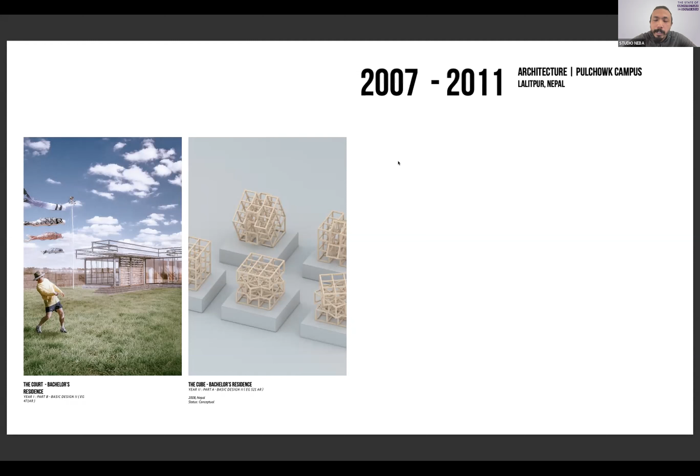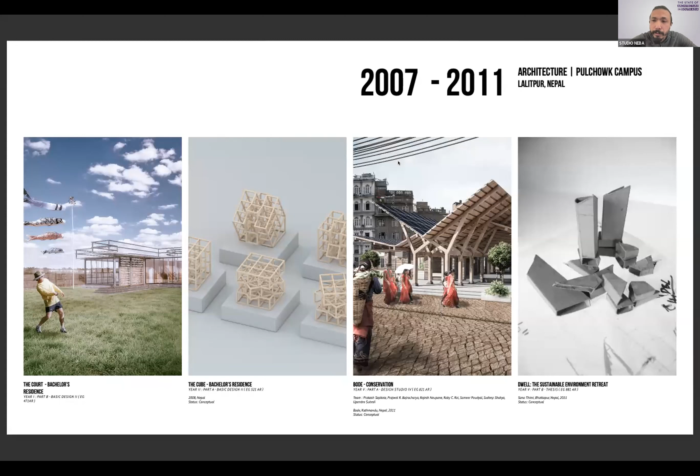And then I experimented on how the different forms could be tallied from the Rubik's Cube itself. These are some of the projects I did with a group of friends in fourth year and the final year in the thesis.

Right out of college, I volunteered at Habitat for Humanity for a year, where I had real life site experience working with natural materials such as mud, doing houses for rural areas. Then there was a project called Hariya Chok by Satya Group, where I worked as a volunteer, then as a project coordinator. In this project, we wanted to explore different ideas on how we could have urban green space in a very concrete city like Kathmandu. This is quite interesting.

I also applied for grad school the same year. As you can see, there's also GSD Harvard among all the documents with this peculiar name, because I wanted to keep track of my portfolio, since every university had different requirements and formats, GRE and all of that.

I did not get admitted to GSD, but here I am talking with teachers and students from GSD, and it's quite the whole circle, I guess - a quite interesting thing that I'm sharing here. Then again, I was looking for different jobs, thinking my portfolio would suffice.

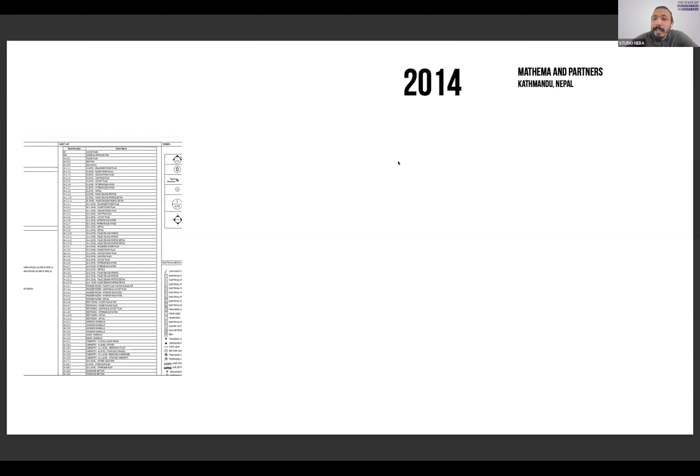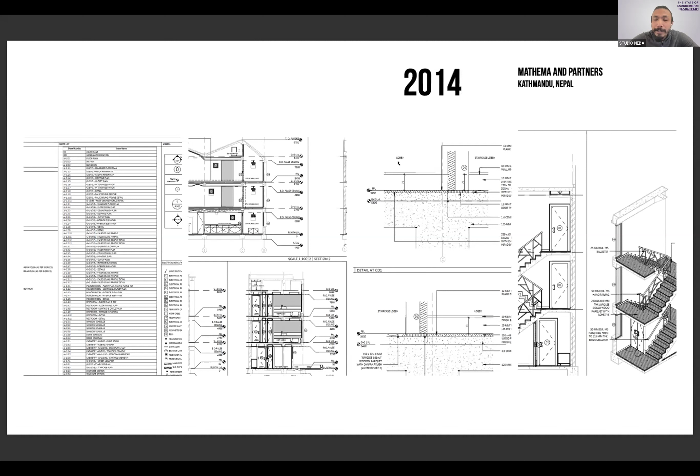After that, I joined a local architecture company in Nepal, Mathema & Partners, where I imagined that as an architect you would be doing design and mostly working out of creativity. But all I did was drawings for one whole year - it was all Revit, detailed drawings, construction drawings, and all of that, for one whole year.

And then the earthquake happened in 2015. This was quite a turning moment in my architecture journey, at a point where I was designing villas and resorts for people from different backgrounds.

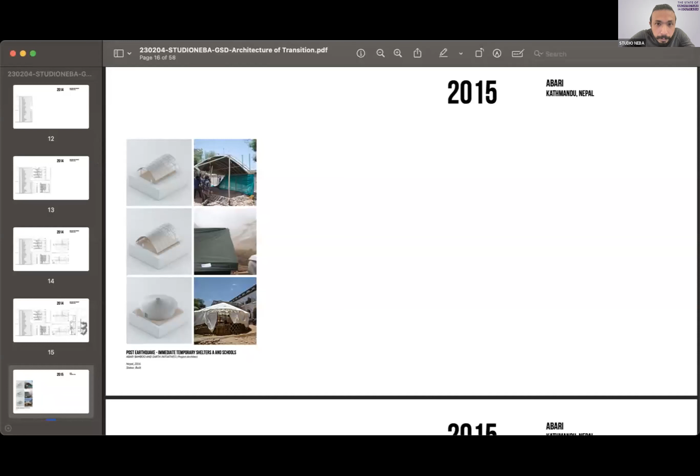But then when the earthquake happened that night, let me just get this thing outside. Is it audible? Hello? Yes, you're still audible.

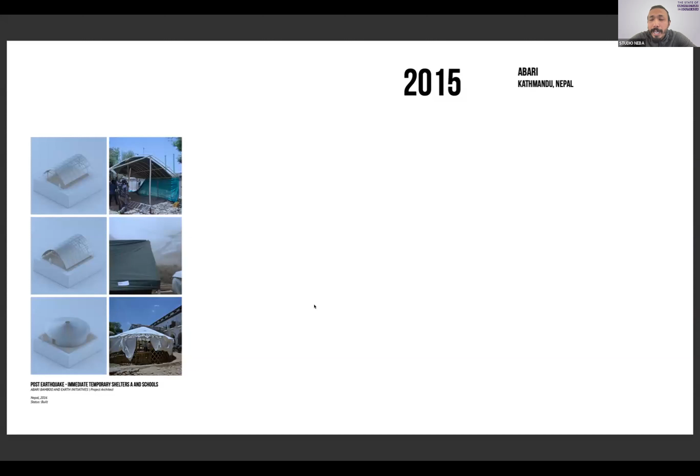In the night of the earthquake, we had to sleep outside because there were still tremors going on. We had this plastic tarp which I wanted to tie some knots and make into a tent, but I just could not do it. At that point, I was working as an architect with 5 years of education, and I could not even tie a tent to shelter from the rain during the earthquake. That was a very thought-provoking thing that happened.

I kind of questioned myself on what architecture is and how I could use my expertise in the field of architecture.

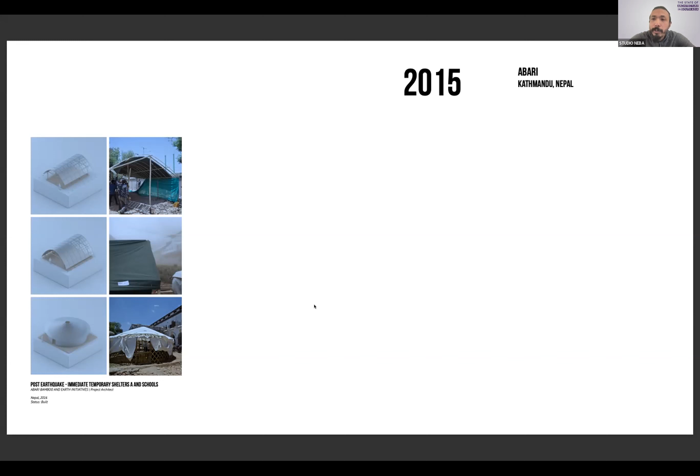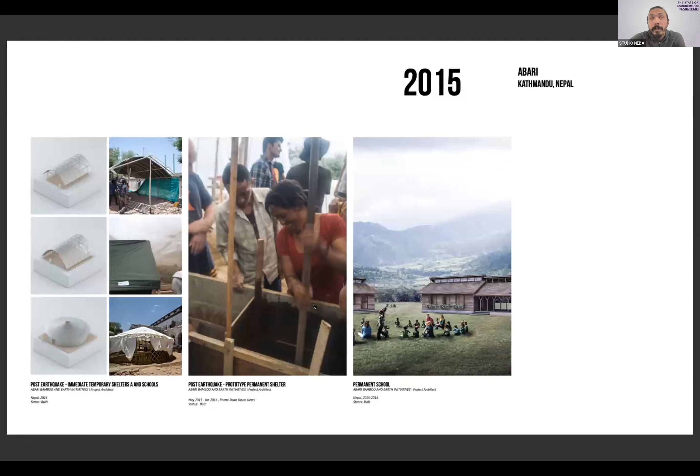So I decided to join an organization doing post-earthquake rebuilding all over Nepal with tents, and then permanent shelters out of rammed earth. We designed schools, and talked with the Nepalese government on how the rebuilding should go on, and again remodeling of the whole village itself with sustainable local materials rather than rebuilding out of steel and concrete.

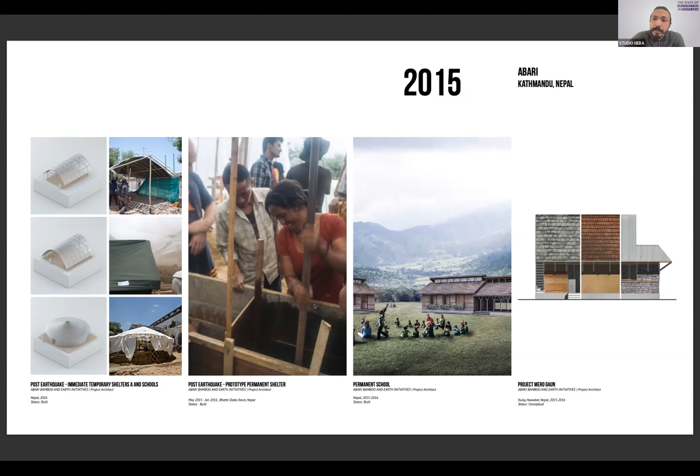And in this place with Alexis Dornier, I worked for 3 years. At this point, I had creative freedom as well as guidance on how the architecture could develop. Somehow we were aligned in our thought process and design, and I led some of these projects when I was in Bali for 3 years.

So in 2019, I decided to come back and I started Studio Neba. Studio Neba stands for Nepal and Bali, which has some rooted connection to where I stayed for certain years of my life, and a place where I belonged.

I started the company thinking I was an architect and could run my own things. But then I realized I needed someone who can draft, I needed a draftsperson, someone who could do renders, someone to design a website. And the list goes on - admin guy, accounts guy, project manager. Basically we needed someone who could do everything, so I decided to hire myself to fill all the gaps, because running a company and hiring everyone was not financially feasible at that time.

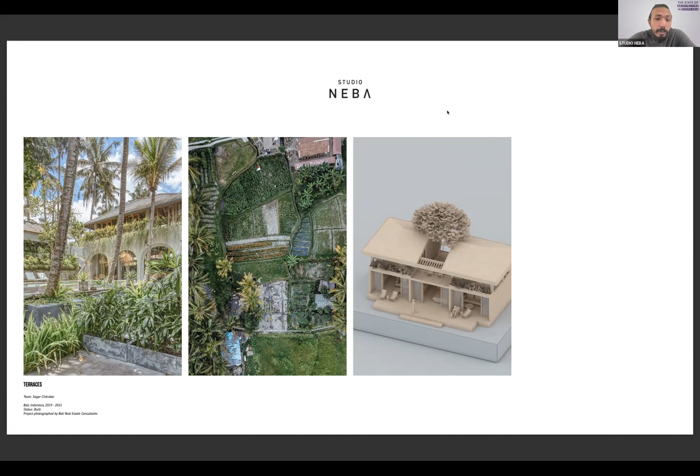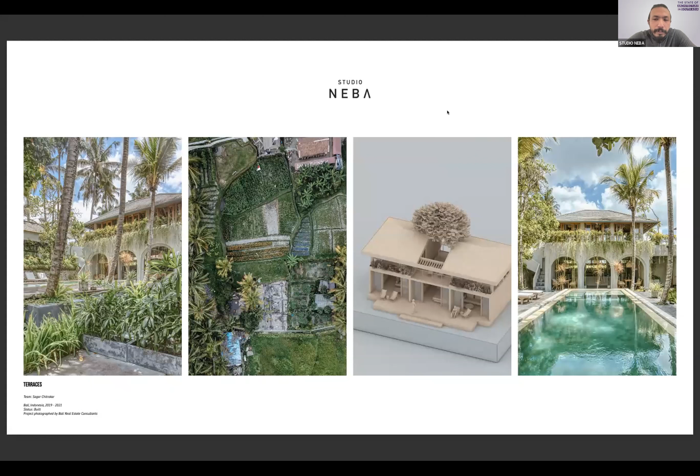It took a while - there was COVID, there was lockdown, and after 3 years the project is complete. I haven't had a chance to go and visit the place, but hopefully this year I'm planning to go there and see how the project turned out.

The next one is Pokhara Villas. This is also one of the first projects we got approached for when we came back to Nepal. This is a project in the western side of Nepal, in Pokhara. We got approached to design multiple villas in a serene mountainous site.

I also clearly remember when we went for the site visit, the client asked how much would you charge? At that point, I had no idea whether you should charge by square foot or lump sum. I had no kind of idea at that time.

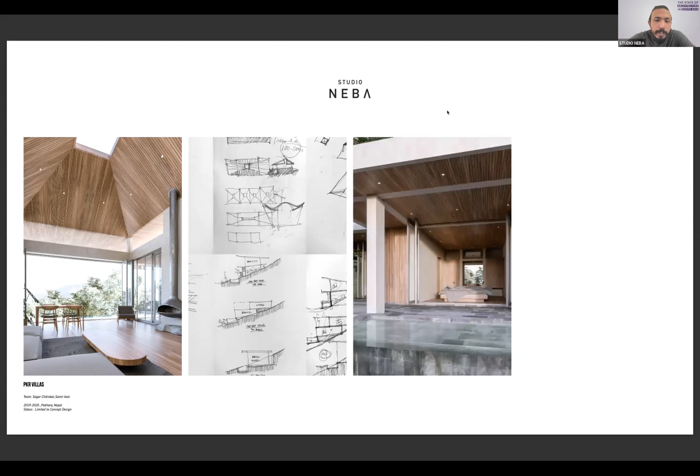We slowly built up the project. As you can see, there was multiple sketching done that could correlate to the contour of the existing site. We played through multiple iterations, and then we came up with this 2 BHK residential villa, which is one unit, and in the master plan there will be multiple units of this villa.

Even in this part there was COVID, there was lockdown, so it was only me and Samir at this time. We were working remotely, passing through the files and doing all the details and design.

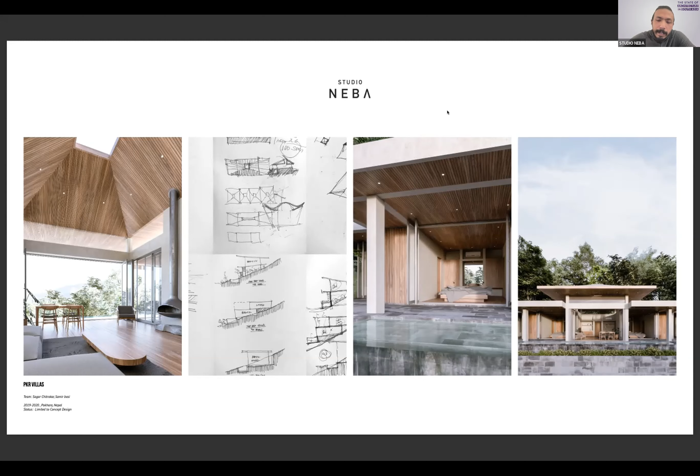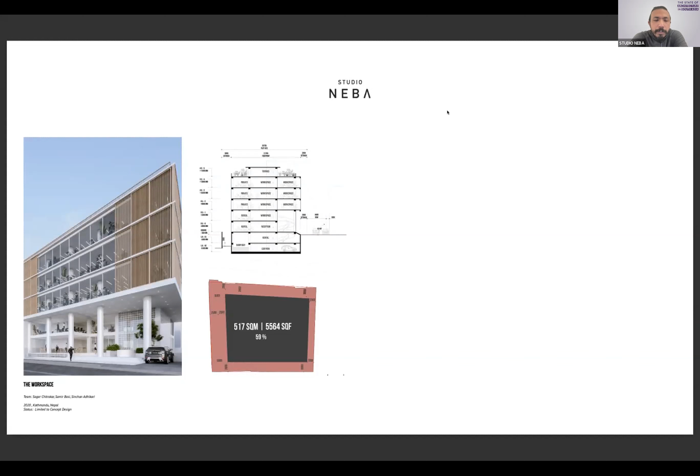Then there's another project, the workspace. This was an interesting project because we had to study all the rules and regulations, all the bylaws that govern us - what to build, how high to build, and what would be the entire footprint of the building allowed by the local government. In this project we had this design drill session that went on for almost a year, where we kept changing the design just to get the maximum footprint and maximum coverage, because this was located in a very prime commercial building.

In this project, we were able to achieve a commercial building specially catered for office use, but we also wanted to create an office building that was inviting for the people working there, not just a typical workspace with cubicles. Since it was facing the south side, we designed louvers that could be transitioned to provide shade within the space.

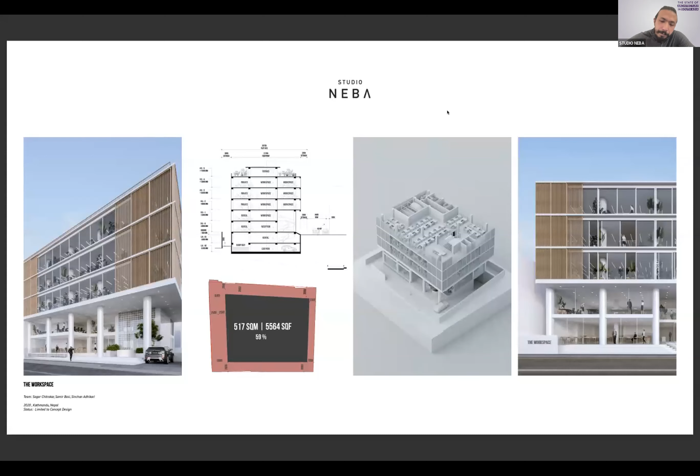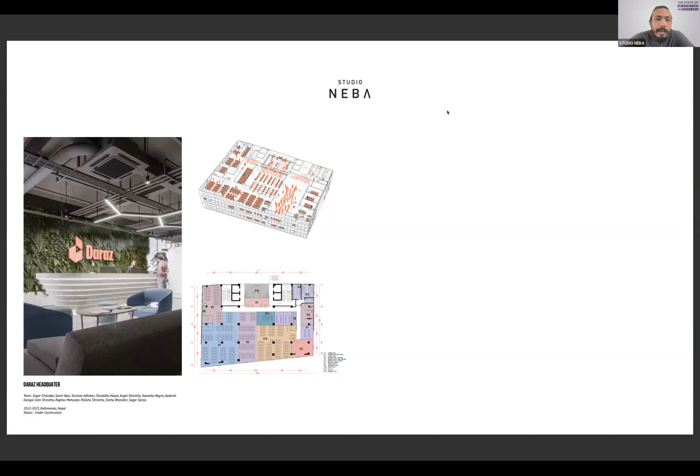This is another ongoing project, an interior project for Daraz, one of the largest e-commerce businesses in Nepal. We were approached to design this 3-story interior for the company. At first, we had to sit with the heads of departments to understand their needs, since every department had different requirements. We hadn't done a project of this scale before, but we had knowledge from prior projects that helped us pull this off.

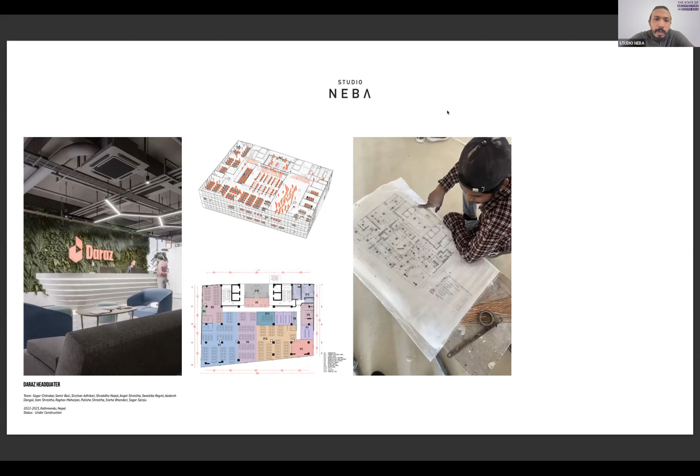In this project, the transition time from design to build was very short. We were also part of the site supervision and project management, where we had to learn new skill sets to bring the project into real life. Currently it's in the final stage of finishing, and as you can see from the first and last photos, we are just a few weeks from completing the project.

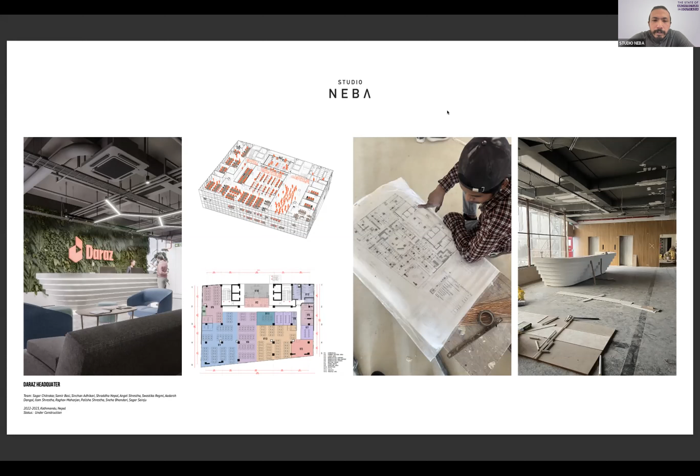As of now, we have nine people working, seven people and two furry dogs. These are all our past team members who have graduated from Studio Neba, and they are currently studying at their own universities, were part of our interns, and some have gone abroad for their masters. So that's a very short presentation from my side, and that would be it, I guess.

Bali was a very impromptu decision. Just having that one-way flight ticket to Bali was something I did out of gut feeling. Before that, the earthquake happened and it clearly changed the route of how I was operating in doing architecture. When I went to Bali, I was exposed to different materials and how they use them, because they're really great in their craftsmanship with wood and stone and all those details. I had a great chance to see the culture and learn from the natives as well.

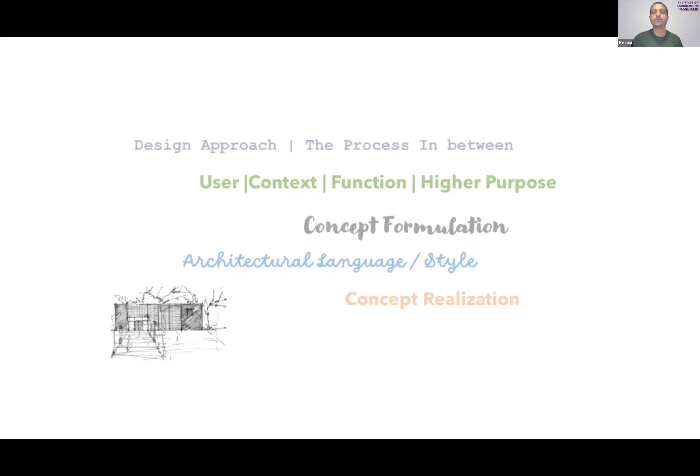In a way, we are trying to explore the theories we learned in the School of Architecture. I don't think we follow any kind of fixed architectural language. If you see our projects, we've done a lot of languages, a lot of styles, because every project is a new beginning for us. So we always try to make new concepts, and it's always a challenge for us.

But going ahead, we always try to work under a policy. For this, I've been inspired a lot by a manifesto written by architect Madhura Prematilleke, who was one of my mentors. I'll explain a little bit the policies we go through for every project.

One is starting with build less: slim the program, build on less, reduce the footprint, grow trees, and build in and out, dissolving barriers between inside and outside, bringing history to life, and adaptive reuse — using reused materials and spaces wherever possible.

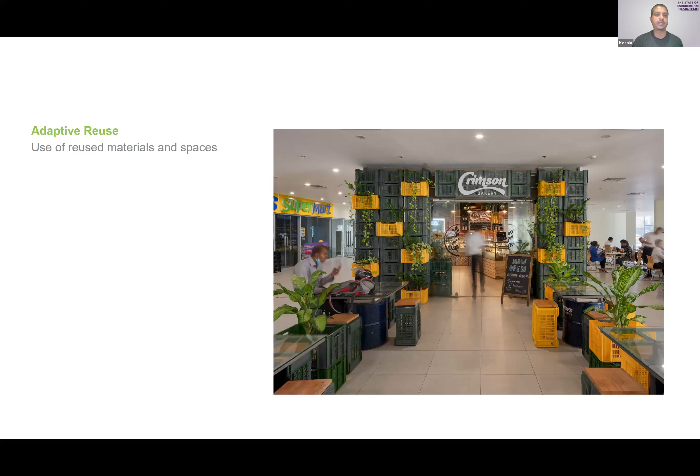Build robust — let it ruin gracefully, reduce the need for maintenance, and build on what's left over, adapting the existing, bringing history to life. Build safe, not sterile — we need to kill the hazard, but we don't have to kill the joy. And finally, build interim — affordable now, grow later.

So with the situation, I think these are kind of the policies we need to adhere to, given the situation of the country as well.

Okay, so that's a little bit of background about us. I will explain small projects, very small projects, three projects, which we think show a kind of different approach we have taken. So, going into the first one.

Helium is a design studio which provides advertising and printing solutions. This project was completed at the end of 2019. It's a renovation of a studio office in Colombo, Sri Lanka.

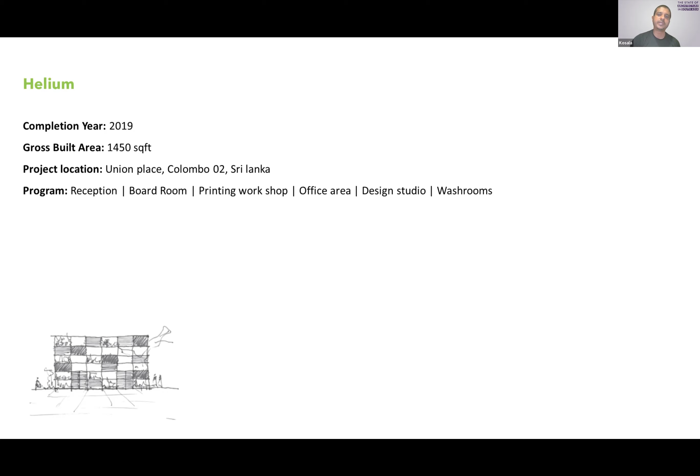The approach was to transform a typical building space — this is the space — into a unique design studio, while giving an eye-catching character to the interior and exterior. The building was situated on a busy street in Colombo.

So as you can see here, this was the situation before the renovation, before the transformation. The building was on rent, and my client is actually one of my friends. He had rented the building, and he has a lot of uncertainty with the economy. So he didn't want to spend much on the project, and he has doubts of sustaining the business as well. If things don't work out, he'd have to shut it off and go. So with that mentality, this project started.

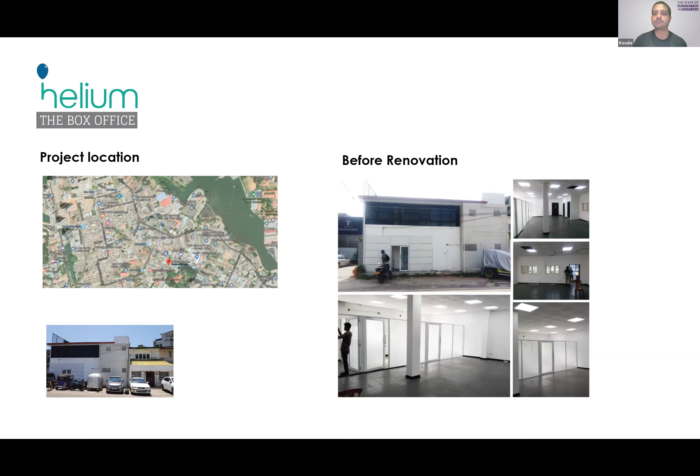To overcome this challenge, we wanted to come up with a concept which is low cost and of course dismantleable as well. So for this, the material palette plays a major role in making the concept as well. We found these reused GI pipes and used wooden pallets, as the client had a construction arm as well.

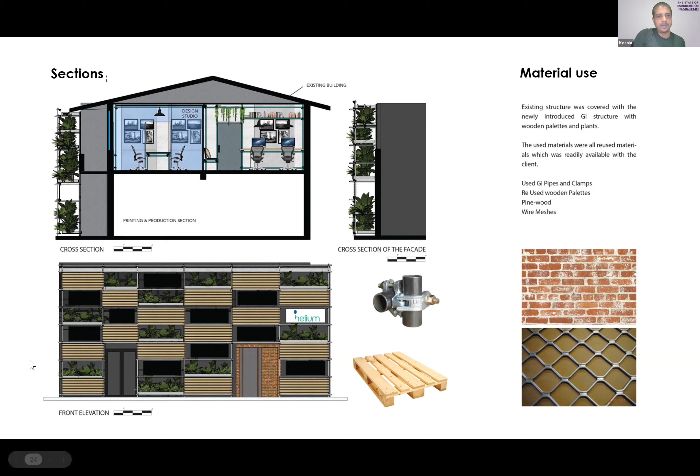So what we did was introduce a new facade to cover the existing one. As you can see here, we didn't try to remake the facade, but we just covered it with another kind of facade, which acts as a double skin as well. So these used GI pipes, reused wooden pallets, and plants on the outer skin make a perfect synthesis, creating a unique facade for exterior and interior. A warm ambience is created through the use of materials against the heavy fixed structure of the neighborhood.

As you can see here, the ground floor was like a printing shop, printing area, but the upper floor was the design studio. So we paid much attention to the upper floor.

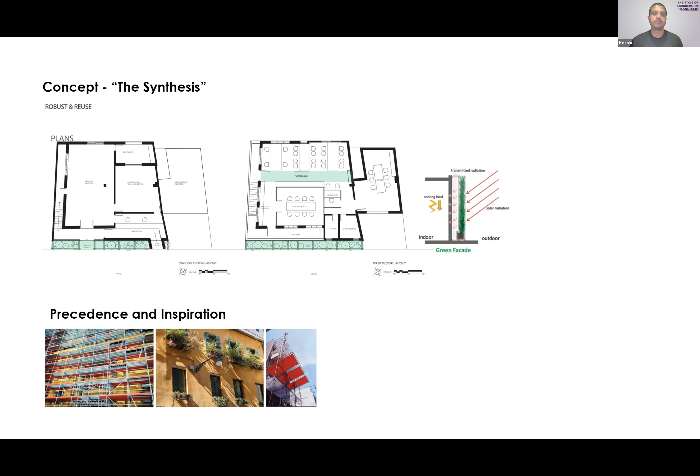So this is the final outcome. I'll explain a bit. The grid facade with plants inside creates the perfect harmony and makes the building stand out well from the urban chaos.

As you can see here, you were seeing the old picture. It was a bit of a chaotic street, but we wanted to create some kind of grid, which takes the attention of the passersby.

So the entrance is highlighted with an exposed brick entryway, and the facade extends to the interior. The interior layout is done in such a way that the main axis of the space is celebrated and connected with other spaces around.

The main axis is highlighted by this green path, introducing a new ceiling, and the greenery was spread throughout. All the workstations are made out of GI structure, which connect to each other, and each of them is facilitated with individual storage spaces as well.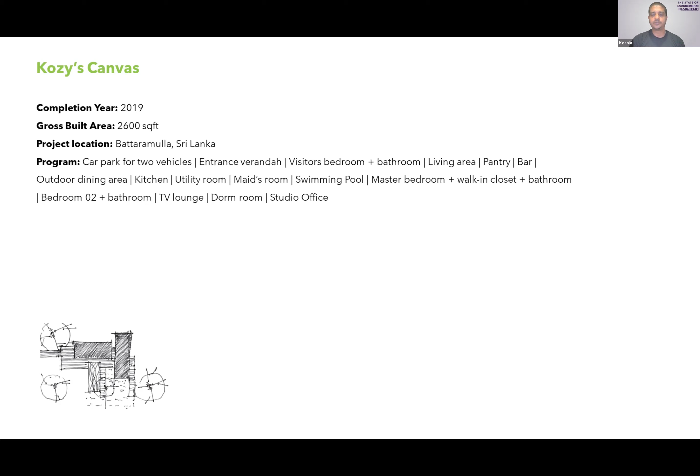The significance of the project is that I wanted to create a dialogue among the public to change the way they think about a typical house, especially in Sri Lanka.

Usually Sri Lankans build a house for a few generations, made with brick and concrete. They build it for their children and grandchildren as well. I think this might be related to the South Asian context too.

But here in Sri Lanka, with the given situations, the crises we are going through, the economic conditions, a lot of newly married couples struggle for a lifetime to pay the debts they took for their houses.

They can still only live maximum 30 to 40 years if they build the house in their 30s. So why do that? I wanted to create a little dialogue, make an eye opener for people. That was one of the ideas behind the project.

Without thinking of typical materials and standards, I tried to experiment with new structural systems and materials.

The site is at the edge of a large water body surrounded by lush greenery. The extent of the site is 8.8 perches. So this is where the building is right now.

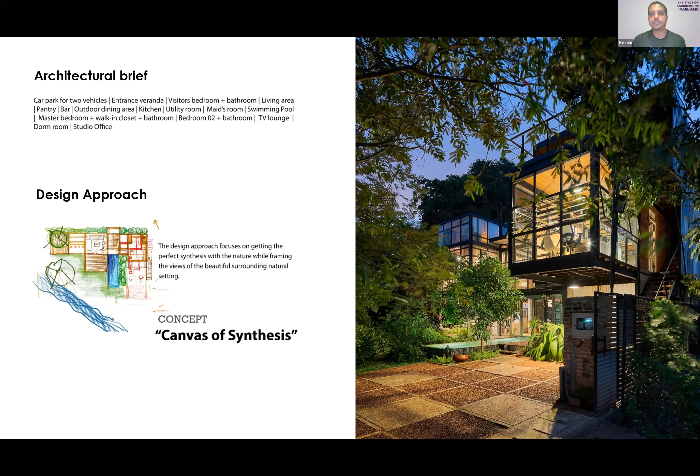This house has 2 wings. The right side wing is for the architecture studio and the renting rooms, while the left wing caters as home for both of us. I didn't want to make it just a house, so I created a few rooms which I can give out for Airbnb, which covers some of my investment.

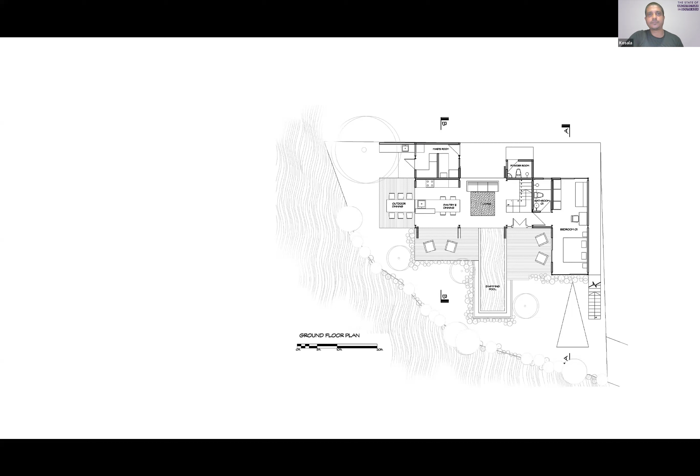The structural system was done mostly out of steel. I wanted to get the lowest possible height and make it as lightweight as possible. The structural design was done in such a way that it counterbalances the whole structure, which ends up using smaller sections.

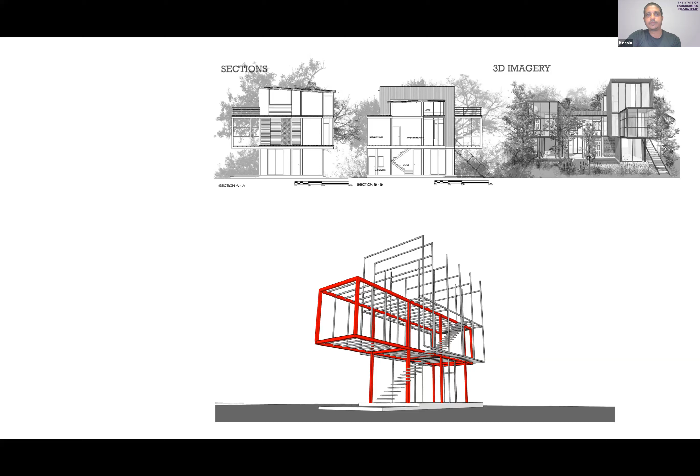There's a lot of outdoor spaces. We have minimized the inside spaces and added a lot of semi-outdoor spaces and cantilevered spaces to minimize the footprint.

Most of the superstructure was done with steel sections, and exposed bricks were used in a few areas. These cantilevered spaces and transparent materials blur the distinction line between indoors and outdoors, while the skin of the building varies in different areas.

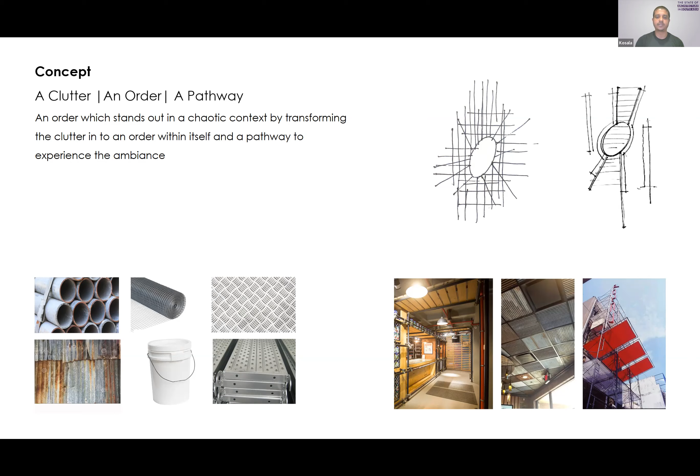What we actually wanted to create was, as I said, given the chaotic streetscape, we didn't want to make it like an alien building, but we wanted to create a highlight. The highlight had to come from the context itself, so we wanted to create this little bit of order within the chaos. That was the whole concept.

We were commissioned to do the interior only, but we convinced the client to do the exterior as well. He was convinced because of the low cost materials used. We got reclaimed roofing sheets, and we convinced the ground floor tenant and the upper floor tenant to do this.

So the exterior actually goes inside, and vice versa the interior comes out, creating curiosity for passers by. The order within chaos - all the shelves are adjustable, the racks are made out of scaffolding plates, and the separations are done with empty and new paint buckets.